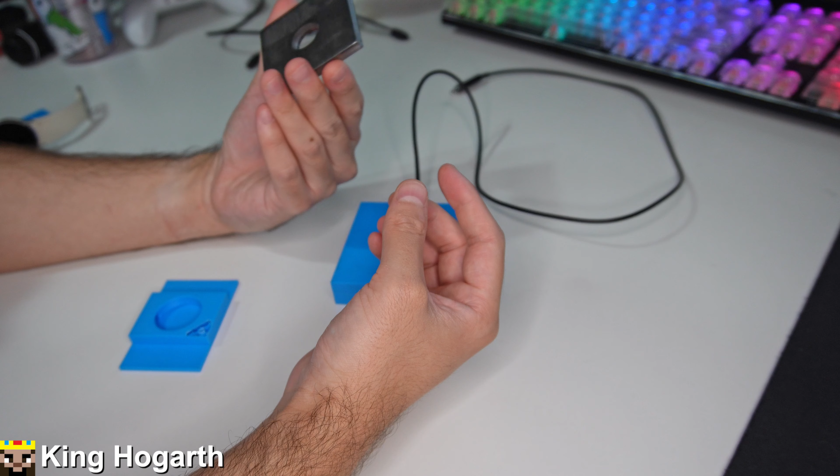I don't know if you can hear that, there is something rattling around in here. And that is this plate here, or one of these kind of plates here. This is a Simpson strong tie. This is just a thing that you use, I think, for when you're assembling two beams together. This is what you put on the ends. It's basically just like a big washer.

You know, they're not super heavy, they're not the heaviest thing in the world, but they are definitely not light. As you can see on here, I have a number here, that is 6.28 ounces. I know my handwriting looks like garbage, but that's how much this particular one weighs, which is kind of how much they usually weigh. I think this is actually the lighter one, and I was using this for all the prototypes. So even the lightest one we have here still worked with all the prototypes.

So that's what we got here, that's what's in here, and I'll open it up to show you kind of what's inside here. This, by the way, is not what the project is going to look like at all, because you can see it's pretty large, especially for the small object that it's supposed to be charging.

There's a different part of it, a part that's going to be made to hold like a phone, for instance, like this phone here. This is my, I don't even know what this is, I think this is like an S24 Ultra. It's the one with the pen that still has the Bluetooth. It's whatever that one is, the last gen one they had.

But yeah, we're just going to open it up. It's held together with 4, 6-32 screws. So that's the size here. These are, I think, 2 inches. No, they're less than 2 inches. These things I think are a little bit shorter.

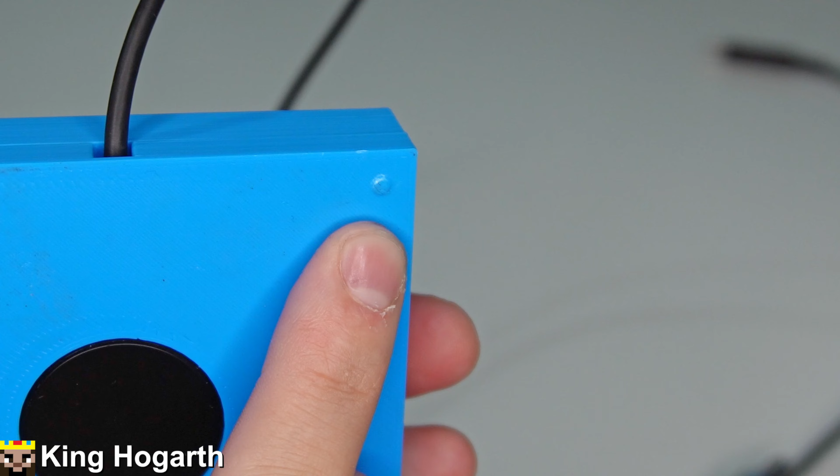These screws I will be cutting later because they are kind of long. Oh yeah, you can kind of see what happened here, I overshot it with the tap, went a little too far, so we had a little bit of damage in that corner there. But we were able to drill and tap this just fine, and the screws go in perfectly. We got these 4 screws here to hold it all together, really nice and rigid. There we go.

I will explain the modification here later, but as you can see, we have our plate here, this one is 6.3 ounces. Here's our sub plate, this is the plate that's in between the steel plate and the actual charger. And then of course here we have our top plate. But yeah, here's the charger, and here's kind of the issue.

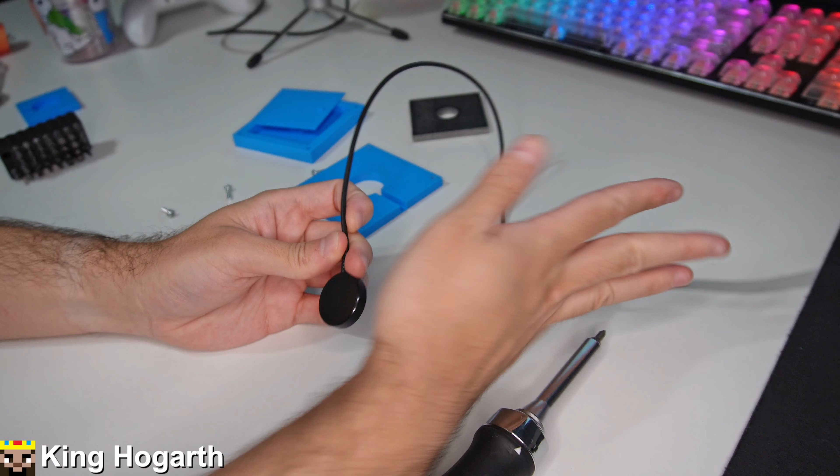So as you can see, it does sit flat. This cable, by the way, because of how it was coiled in the box, kind of has a knack of lifting and moving around. But you have the watch on it, you know, it charges just fine. But when you want to take it off, as you can see, it's stuck to it, so you have to manually hold and pull it off.

And this magnet, it's pretty strong, it's a pretty strong magnet. And when I was choosing what to use with these plates here, I was attaching these prototypes to little boxes, and I was filling them with screws and nuts and bolts. And well, it turned out it took about, the scale may be completely off here, but it took quite a lot of weight, around 6 to 7 ounces to remove it.

But yeah, I did those, found the weights. I was always thinking about using these for weights, but the fact that one was enough for this thing to let go was a good thing.

But yeah, let's talk about the design of this thing and maybe some of the weird things here. I just wanted something simple, something flat, something that could hold the charger itself and the metal plate here. It came with a simple little frame for the plate here, and there's supposed to be a little post in the middle, but this one was printed too big.

Here's the original prototype of this. As you can see, it's quite a bit larger, but the post was the correct diameter. And as you can see, it kind of fits there.

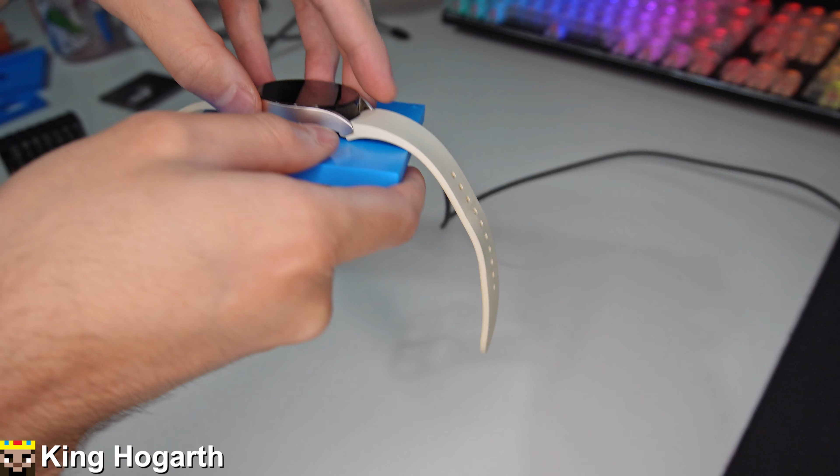You have this, and then I have a sub plate. This sub plate goes on top and provides that little notch. That's the reason this exists, and it's actually hard to see why. The cable is not flush with the bottom of the charger or the top of it, so that little notch is there to prevent the cable from having upward movement, which in my testing keeps the charger from coming out of the hole. So that was something I had to figure out, and this little piece of plastic to make the cable flush did solve that issue.

There's technically one built in here too. As you can see, there's a kind of lip around here because this is a slightly smaller diameter than the diameter here, and that provides a little taper. It doesn't go straight up and down, it has a bit of a taper there. I'm a little tired today, so words are hard.

Like I said, this is not the finished product at all. I'll show what the finished product will hopefully look like, but I want to show off some of the earlier prototypes. I wanted to see what kind of weight I would need, so I made this thing with these little flaps. I should have made them cups, but I made them flat for some reason.

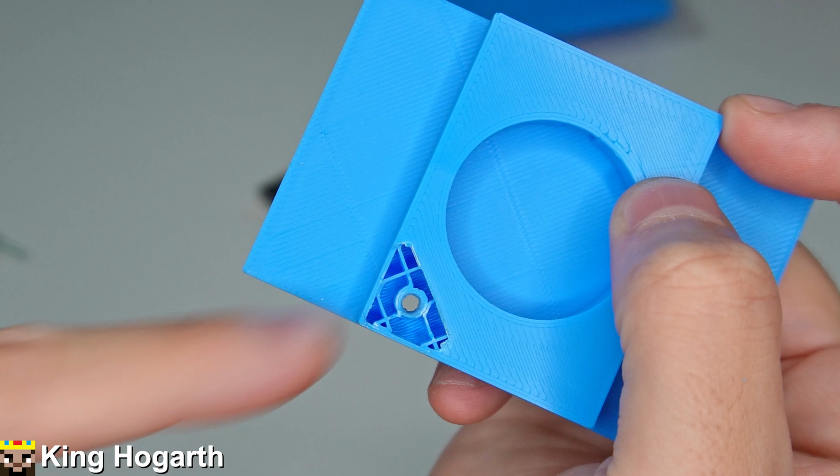I just taped stuff to them, in fact I taped the plate to them like so, using some masking tape. That's what this was. I also wanted to see screw depth and how much I'd have to cut off if I made something small. As you can see, I went a little too far on this and punched right through. This was also to check clearance sizes and pilot holes. Oh yeah, and back to this one, the big square thing.

I also figured out some countersinking for the screws. As you can see, they go in there just fine, and the printer is able to print this without supports, which is definitely a plus. That's the other design philosophy behind a lot of this stuff: I have to make it so I don't have to print it with supports, because I don't like supports. Supports are my least favorite thing to deal with, especially with the filament I have.

The filament I have is kind of hit or miss, so on some prints the supports come off easier than others, but I'd rather just not need supports at all. That's why some of this stuff looks a little weird. I know I could use magnets for a lot of this, so I wouldn't need countersinking or supports, but I don't have magnets and I like using screws. It's more of a challenge for me, and I like to challenge myself on these projects.

They seem simple, but they only seem simple once I've done them. That's kind of the thing I've noticed - it's much simpler when you're done.

We can just reassemble this. I'm actually using this right now because I do want some weight here. The threads are fine - I've unscrewed this thing over and over just to make some adjustments. It's like disassembling anything with screws and plastic, like a Nerf blaster or something - you rotate the screw backwards until it clicks, and then you go in just like that.

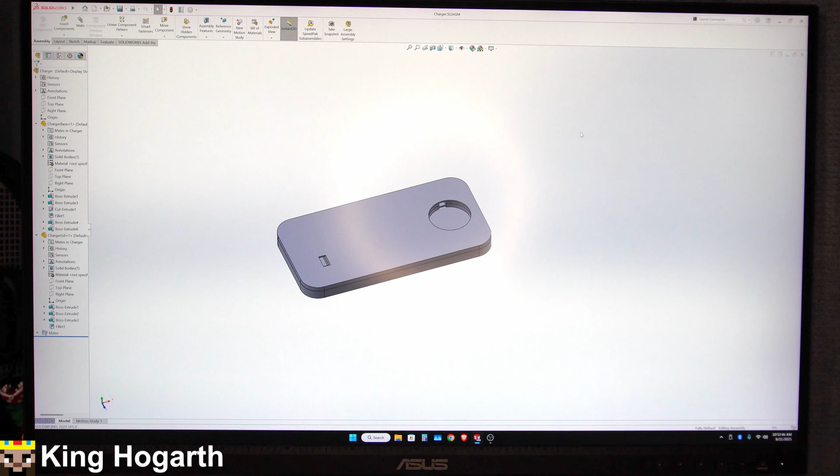So here we have our potential future build. Instead of this having 3 pieces, it's actually printed as 2. This will be printed as 2 pieces here.

So we kind of have our watch area here, and then over here we're going to be having just a USB-C cable for the phone. I am thinking about attaching a phone stand, like an angled phone stand here.

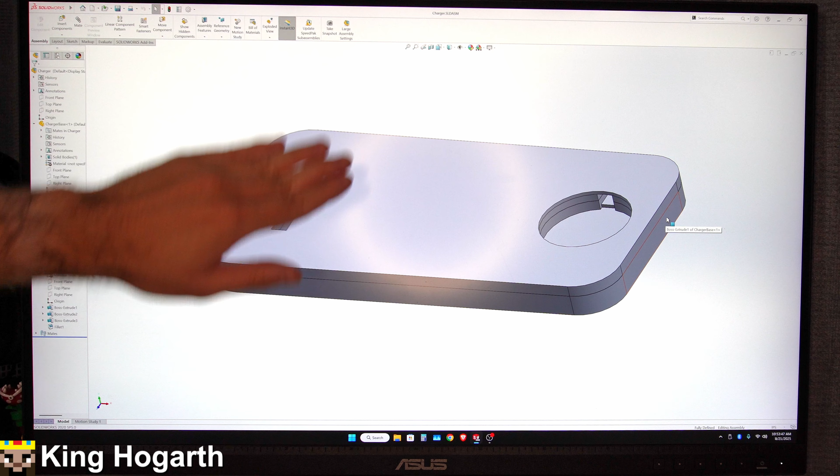I'm not going to get fancy with it just yet, like having something where you can just take the phone and plug it in. I'm just going to have it so you still manually have to remove it, so it keeps it all together and it's not flopping around.

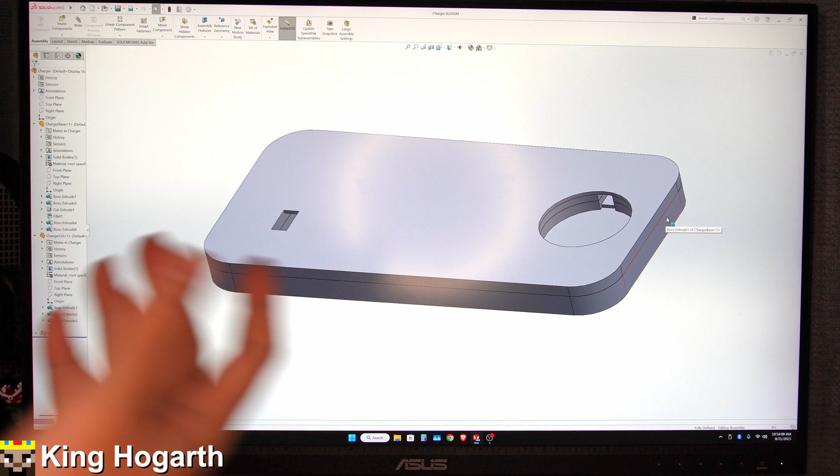Because right now, my USB-C cable keeps getting stuck in the drawers right underneath it. I keep losing it. So that's what we're going to do here, making it all one thing.

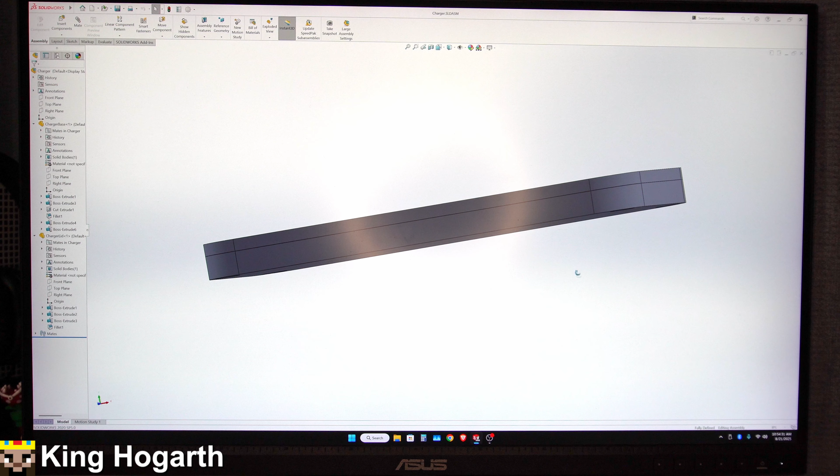This is, I don't know if I'd call it significant, but it's probably not that significant - it is thinner than this. It will be thinner because simply put, the charger is not actually on top of the plate.

Instead, if we go over to our base model here, we have the plate in the middle between the watch charger and this little channel here, which is where the USB-C cable is going to go. That way it makes it thinner and kind of centralizes the weight.

Now this channel here is not final because I am thinking about putting a screw somewhere in the middle here, like maybe a 1/4-20 screw, to be able to attach the phone stand.

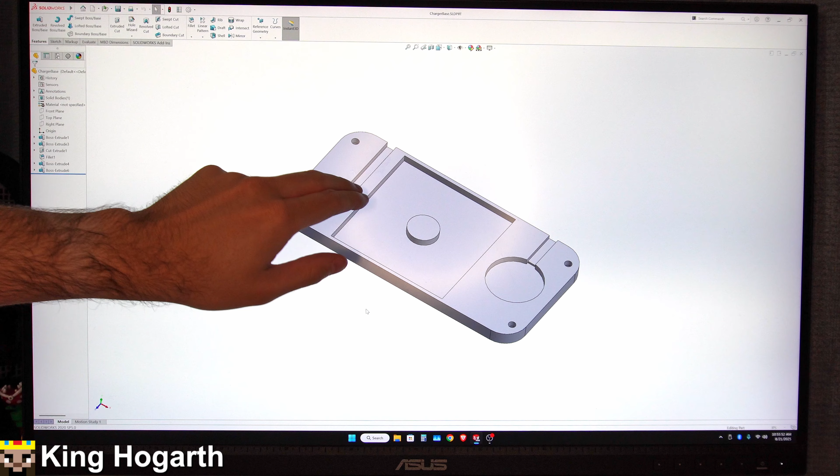I could theoretically model the phone stand part into the top half, but I'm not going to bother with that because it still has some relatively weird geometry that needs to be more precise, and the supports leave stuff behind. So I'm probably just going to curve this around, and it's going to come out through the top.

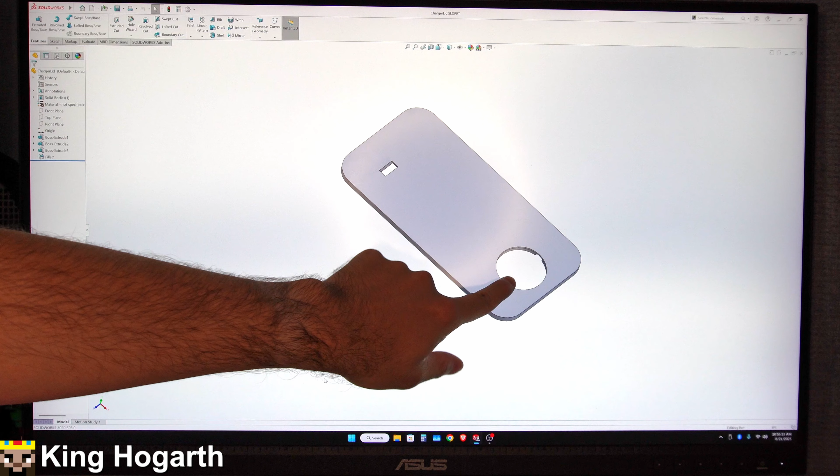Which we do have right here - so you have the watch, and that's where the USB-C cable comes out. I might shift it over a little bit more as well, but we have to keep in mind we don't want to run into the plate here.

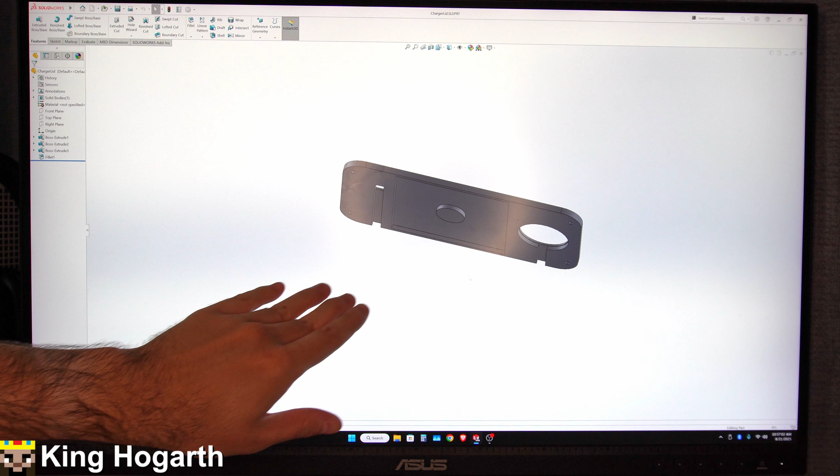This actually had some interesting design choices. Originally I was going to make this top half be completely flush and flat. Then I realized, how am I going to thread the screws into this thing? That's when I realized that.

So basically what I did was I took the base part here and just cut it in half, then added some more material there. I might cut this down even further and make the top half be the thicker part.

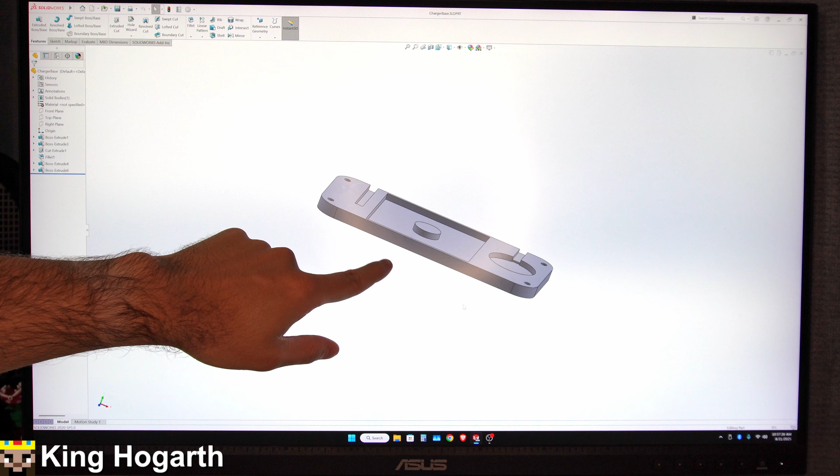Simply put, this is not going to have threads in it. The top half is going to be threaded.

And also we have countersunk holes here so we can countersink the screws so it lays flat, and maybe add some rubber feet or something. I have to find some rubber feet.

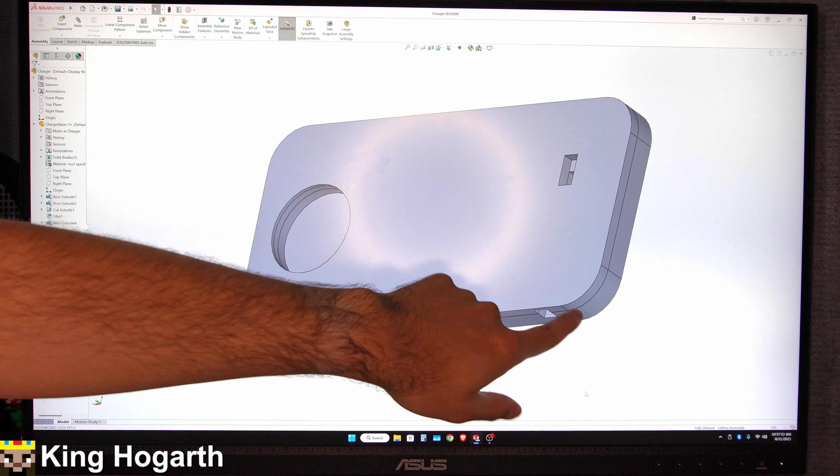I also added some fillets to the edge here, so it looks a little nicer than the big square. I've found that more appealing looking objects are more rounded than squares.

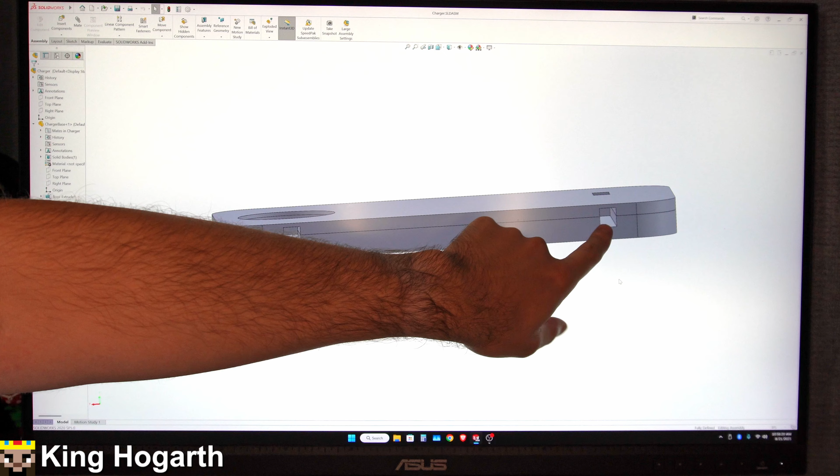So that's what it looks like for now. Maybe I'll change some of these holes here as well, rounding them out instead of making them squares, but we'll figure that out.

Kind of looks like a cell phone, but it's not a cell phone. I kept making jokes to myself saying, oh, it's a Nintendo Switch, because it looks kind of like one, with the screen in the middle and the Joy-Cons. But yeah, so that's kind of what we're working on.

Not sure when this project will be done. Maybe next week we'll be doing another update video.

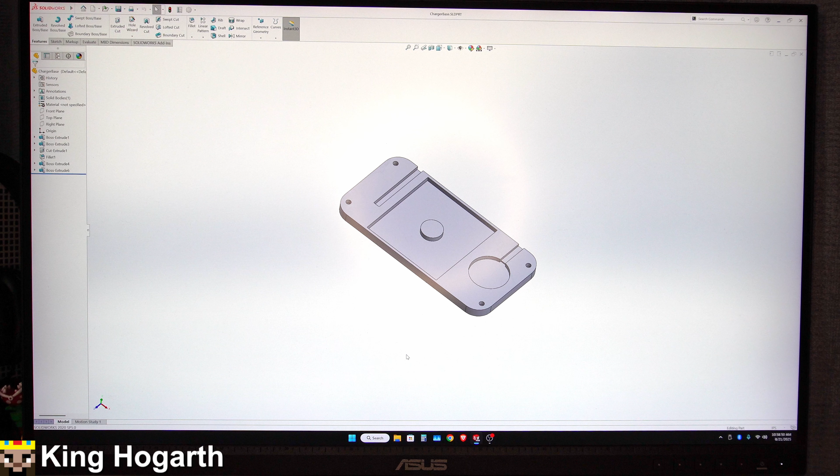I know I could buy something very similar to this. I'm pretty sure you could even get a weighted chassis for your watch chargers and stuff. But I think this is more fun - I can make it how I want it to be.

Also, I learned a little bit better about 3D printing and all the ins and outs of my printer and the filaments that I'm going to be using.